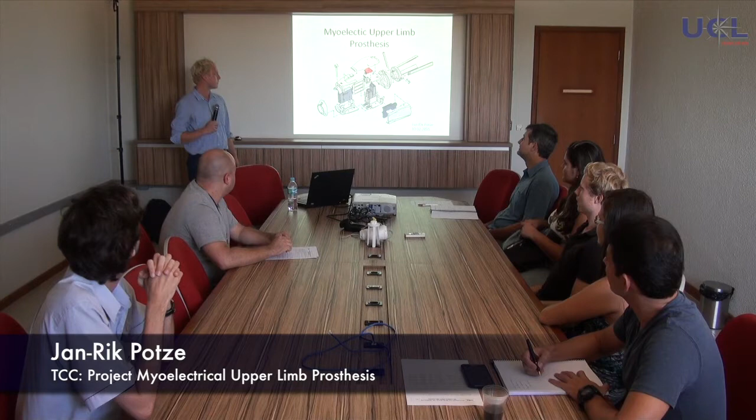Okay, welcome everybody to my presentation. It's about my final project, about a myoelectric upper limb prosthesis. I'd like to tell you today something about what I did the last half a year here in Brazil.

First, an introduction. This morning when I woke up, I opened a bottle of water and drank from it, and it was very easy to do with two hands. I thought of it, and it's just like people who do not have an arm or have been amputated. They have a lot of struggles with this, of course, and I'm here to find a solution for that problem.

Very briefly, I wanted to tell you about—you can ask questions anytime, but you just said that it's not necessary. Can everybody understand me, or am I talking too fast? It's okay? Okay, let's start.

The goal of this project is about the development, if it is possible, to develop a prosthesis, myoelectric controlled, for less than €300, which means the myoelectric is actually muscle signal powered. But I will tell you about this a little bit more in the next slides.

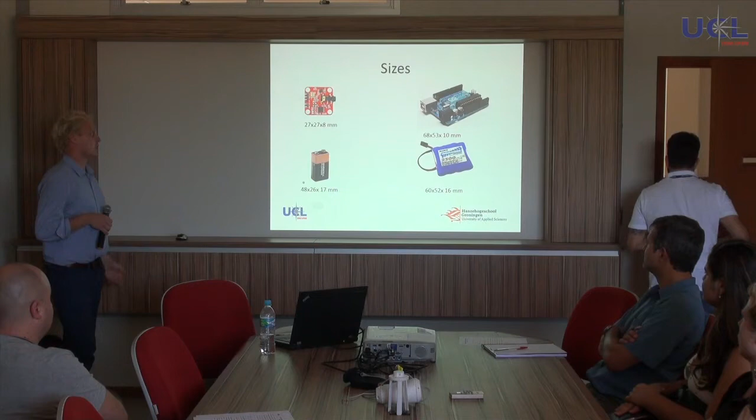Then I found the sizes of all the components, and the weights as well. These batteries—I need 2 of the 9 volts—are about 100 grams, so it already became a heavy prosthesis. Then the battery pack itself was 100 grams as well. The Arduino is a kind of big microcontroller, and the sensor is not a problem at all. So I went through and tried to make it most compact. I came up with this.

In order to control everything and to be sure that there's still space for wiring, I placed it like this. The total space needed is 105 millimeters in length, 45 width, and 65 millimeters high. And therefore already it is a big prosthesis, because there's still not a housing on them. The sensor is placed on top, and this is because of the ability to power.

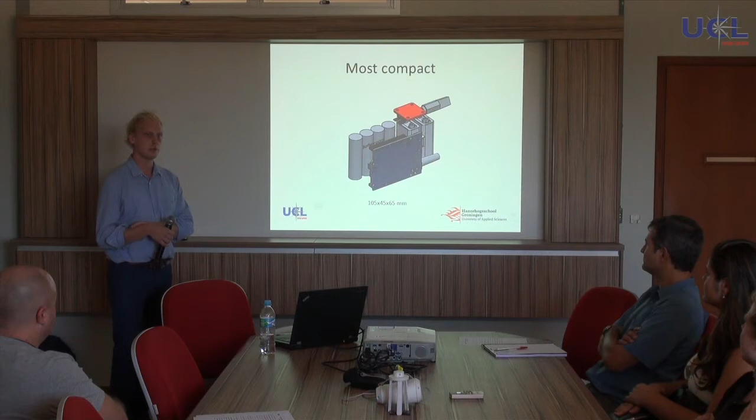To guide the electrodes, it is placed with a cable, and the cable needs to be inserted in the sensor. To do this easily, I thought it would be nice to do this on top, and that's why I placed it there.

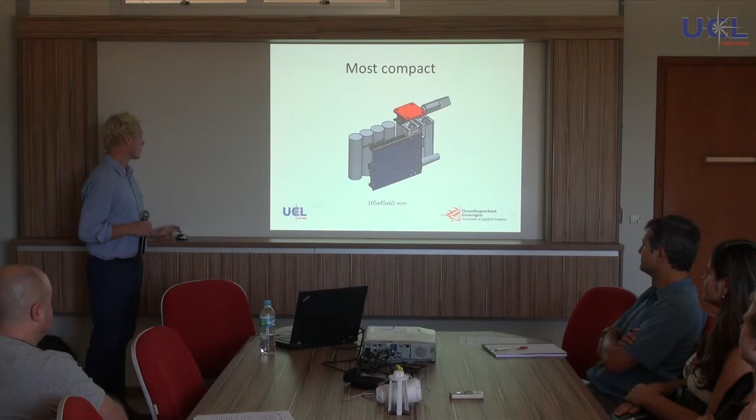Then I went designing, since I found the space I needed. It's stated that it should be anthropomorphic, meaning it should look like a human, so that all the components fit into the arm. I made another part which connects the arm into the residual limb, and this part is called the socket.

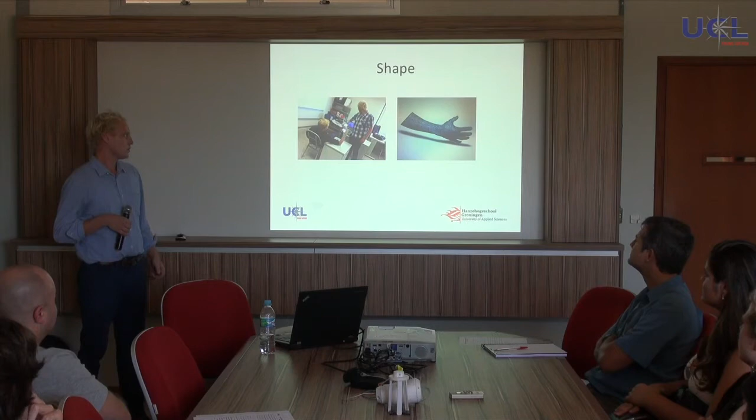So to get the shape, I first started designing, but that took a long time. Later on we could use a 3D scanner, which is here in UCL. We started scanning and got a model, as can be seen on the right picture. This model I cut off the hand, because I only need to make the arm of the prosthesis. This model was obtained in SolidWorks, a program I'm working with to design.

By redrawing this model, I got all the dimensions and the relationships between the dimensions of a human arm, so I could work with that. Then I tried to fit it in. I made the arm 105 millimeters, 45 wide, 65 height, like it was needed. And as you can see, it does not fit in.

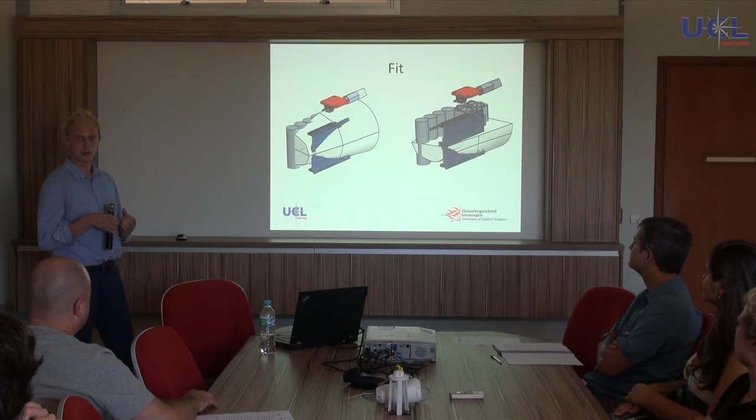Another solution I had to find. So I started designing, placing a box around the electrical components, and figured out how I could make the arm work by changing the relationships between the dimensions. I gathered another design.

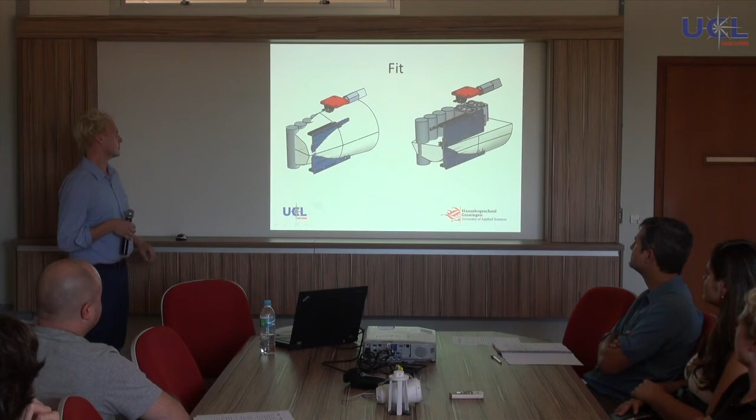So I made a final design, and all the components could fit in. Now, this is my final design. Well, all the components can fit in right now. It's obtainable to replace the batteries through the hood — I can show you later on. And that's my final design.

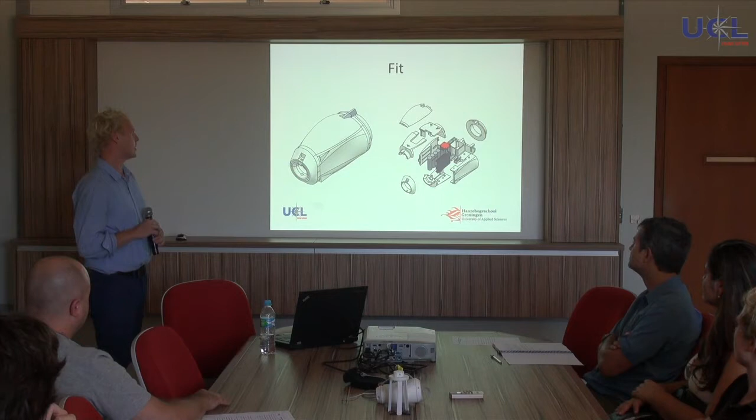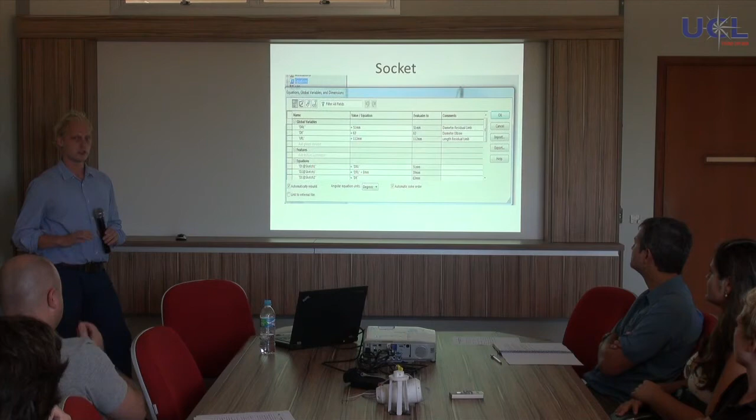And now I needed to find a way to connect this arm to the residual limb, the part called the socket. So I made the socket, and I made it in a smart design, a very simple socket. This is because nobody has the same residual limb, so it's not possible to make just one socket — it doesn't fit everyone.

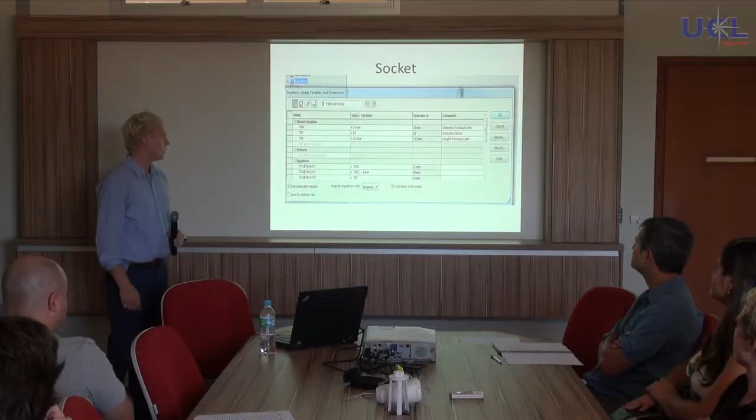So I made a smart design, which I would like to show you if that's okay, and maybe you can understand a little bit more what I mean by smart design.

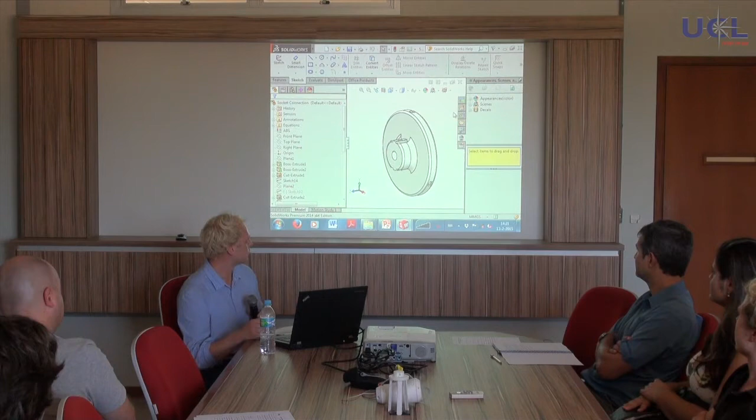When a person downloads all the parts, it is easy to open them. A patient can change the dimensions of the socket. You need to do this for all parts of the socket, which is in the folder I just opened. By simply clicking on the equation box and managing equations, you can fill in the diameter of the residual limb — this is the place where it's cut off.

So let's take a value like 60. If all is okay, it changes. And now this is round 60.

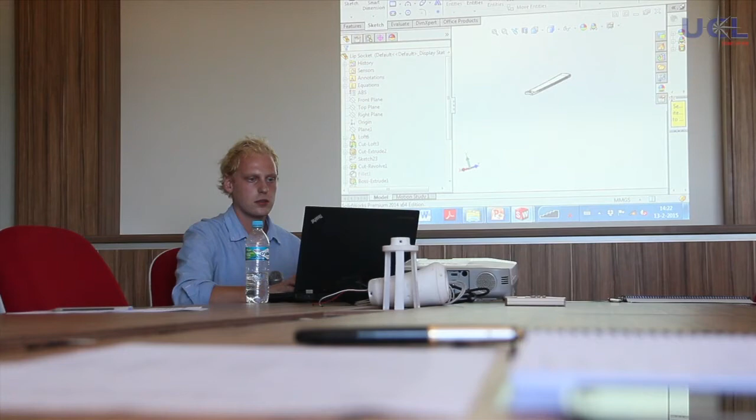So, here's another part — can you see it well? A little, right? Do this the same way: equation box, and fill in this dimension, 60. And at the end, where the elbow is, there's a diameter as well. If you measure it well, you can put in any value, like 80, not 800. And the length of 100 is okay for now. And the socket is changed.

And if you go to the assembly of the prosthesis... where is it? I'm sorry.

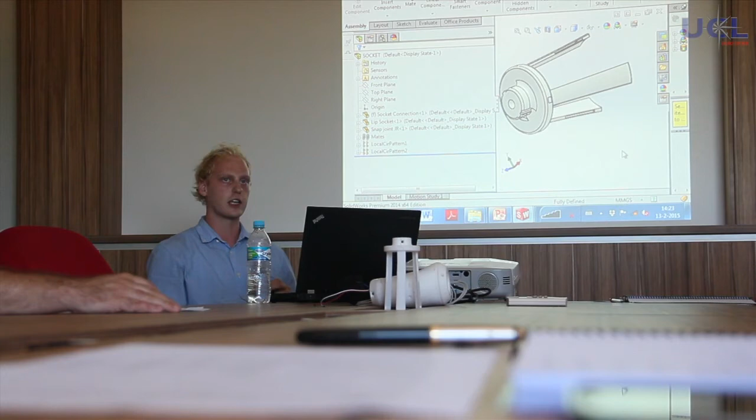Rebuild, and now you've got a socket made to your own dimensions. You can save this again as STL files, and then it's possible to have your own socket.

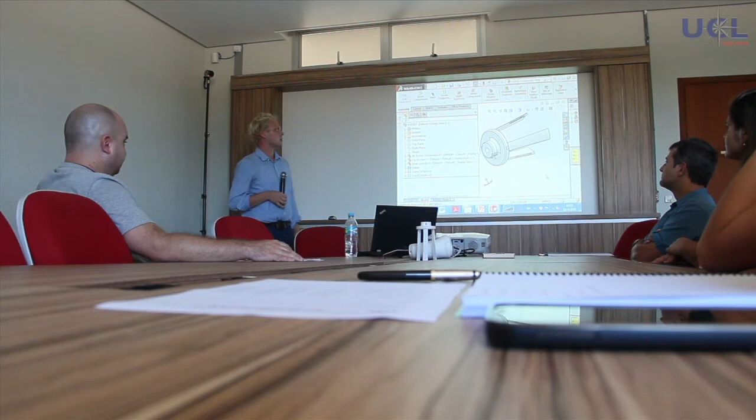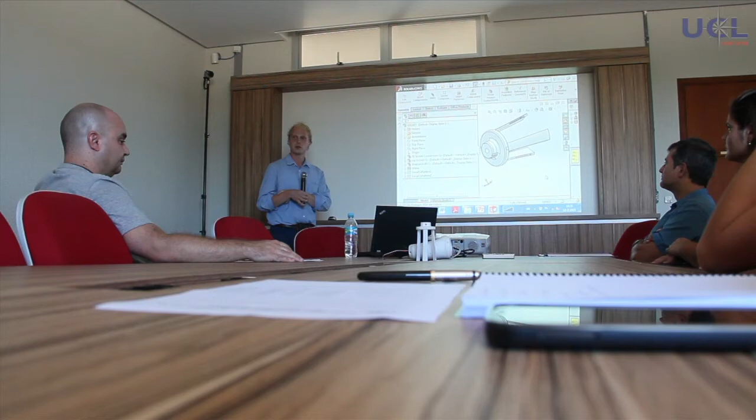Why are there 3 lips and why is it a little small? It's because of the placement of the electrodes, which you need to account for. I placed 3 electrodes at 120 degrees apart, because everybody has a different muscle area. So first you need to find where the electrodes can be placed, and then where there's space for the lips. It can all be changed very easily.

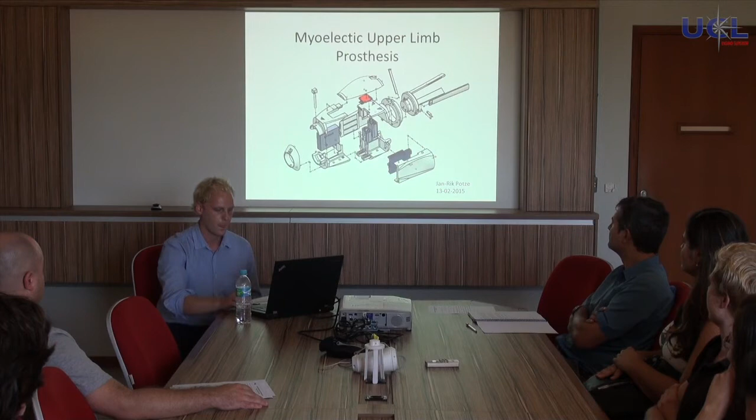I need to open the PowerPoint again. No. Where were we? Here.

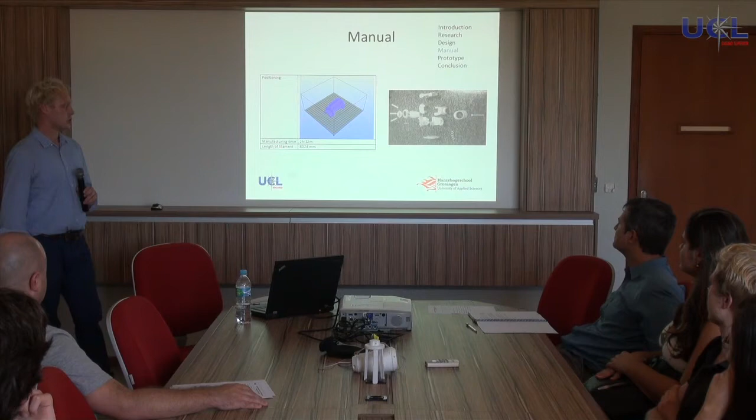That was the part socket. After the final design, I made a manual. The manual describes all parts, how you should place them on the 3D printer bed, how long it takes to manufacture all the parts, and how much filament you need in meters. These calculations are based on 3 millimeters thickness of filament and 0.3 millimeters per layer printed. This is just a value to give an example.

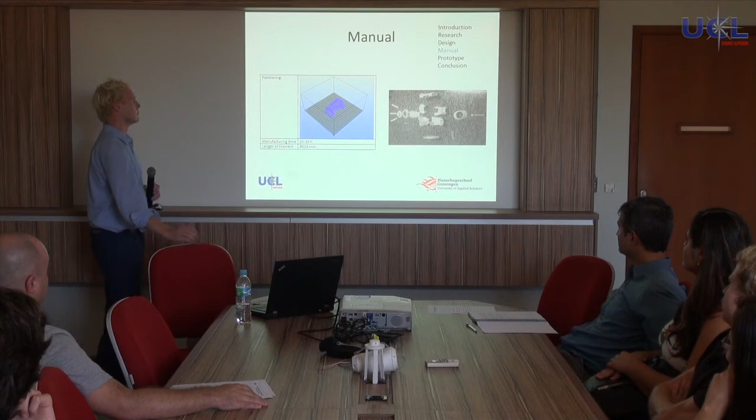At the right you can see all the parts that I printed, because it was time for the prototype. After I gathered all the materials and printed all the parts, I could assemble the prosthesis. I used a printer here at UCL, and the prototyping went very well.

I could test it on a patient's body, on the residual limb of a patient. This man had an amputation not at the middle third, but at the beginning of the arm, so it was not going to look really anthropomorphic.

But I could test if the socket worked, and I placed it on his residual limb with the sleeve, and attached it with Velcro, really simple, available everywhere. I could not take it off his body by pulling it, so I think that has proven that the socket fits very well.

The arm could be attached to his body, and it appeared that he found it really heavy and really big, but that was quite expectable because he has an amputation at the wrong level. So that was my prototyping session, I believe.

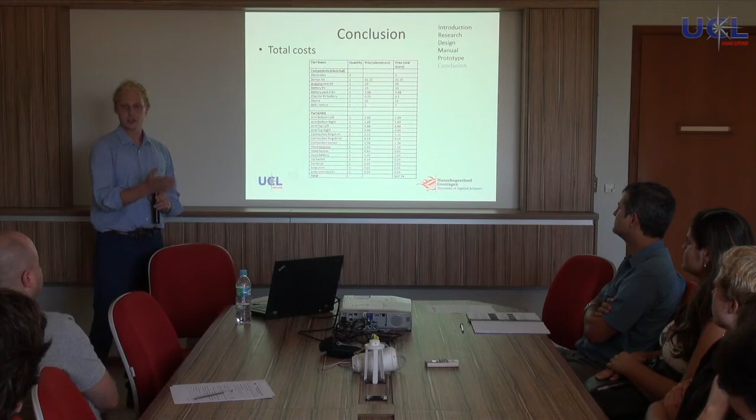And now some conclusions about it. I went one step too far, I believe. In the beginning there was a question: can you make this prosthesis for less than 300 euros? All the electrical components cost around 100 euros, whereas I did not account for the hand calculations, because that's Stefan's part.

For material, ABS is about 17 euros, not counting manufacturing hours. That totals around 120 euros, and I estimated about 50 euros for the hand in total. So a total of 170 euros, which is less than 300 euros, the maximum. So that fitted, it went okay.

Another conclusion is that because of printing it, when fitting it on the patient we were working with, it was not normal, it did not look right, it did not appear well. So I made another arm without any electrical components. These components are placed on the back now, and therefore it is possible to make a prosthesis matching exactly the dimensions of the patient's opposite arm.

It's the same smart design as I showed you with the socket, but I can show you that as well. I would like to show you, and that's going to happen right now.

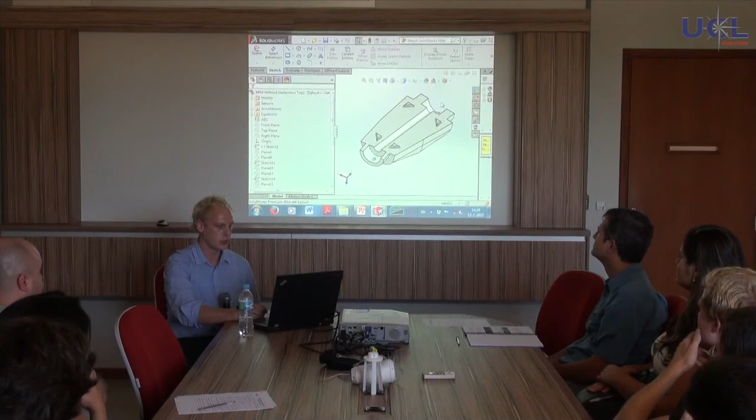And I made this really easy. There's only one slot in here, which is there for the wiring of the servo motor. That will always be necessary.

In here, the only thing you need to do is open the manage equations box again and insert the length of the arm that is missing. So let's say 50. And the width of the wrist - there's this dimension I can't show you right now. So let's put a value of 40 there.

And if all is well, we now have a changed model. It's really, wow, really small. Too small, I believe, because it's not going well. And I don't know why.

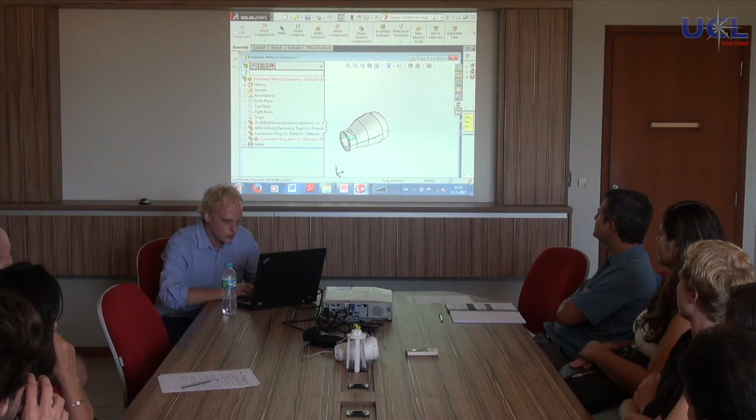As well. I don't know why this is not going well. I really don't.

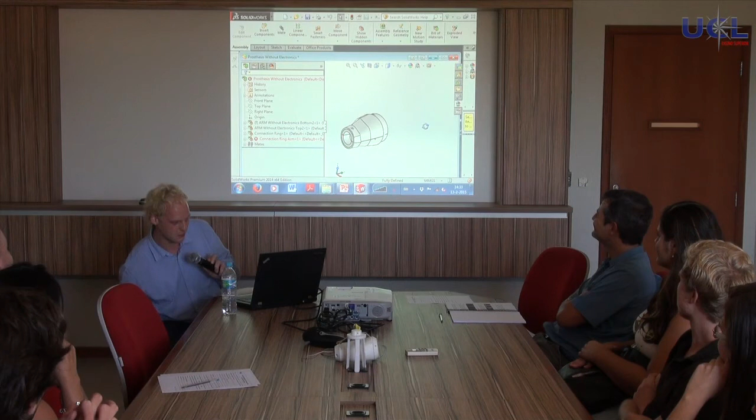Well, this could have been really well, but didn't work. There's a little problem. I don't know what it is. Yeah, Murphy's law - when it needs to work, it doesn't work.

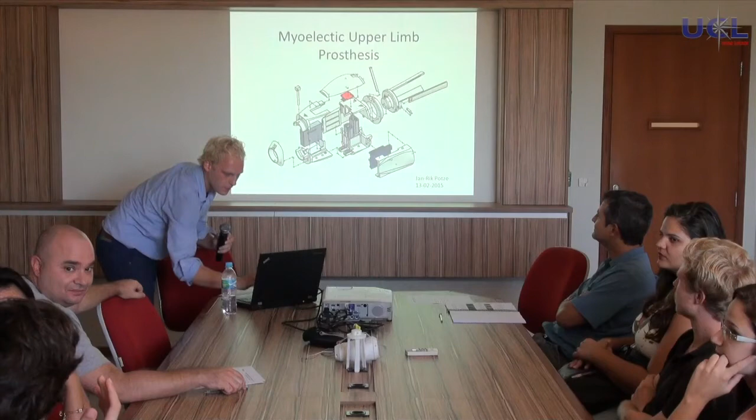Too small, probably. I think now I know why - I made this 35 millimeters round. It's a stated value. When you put in a value which results in less than 35 millimeters, like I did right now, it does not work. I'm sorry for that.

I just go really fast. So this was the other conclusion: it is possible to make a myoelectric prosthesis for everybody, for every patient. It is possible.

Just due to the fact that you can change the socket and you can change the arm if you think this one is too big or too heavy. So therefore I think the project worked well. I'm really glad with the results.

So that was about it what I wanted to tell you. Well, I just can say everything is different - nothing is done the same. If you make an appointment here at 9 o'clock, for example, in the Netherlands it would actually be 5 minutes before 9. Here it's like 10 or 15 minutes later.

But these things happen, and in the beginning I had a real big problem getting used to that. Why would you otherwise make an appointment? But later on I learned how you live, what you do, how it works. I still do not agree, but I can understand it right now.